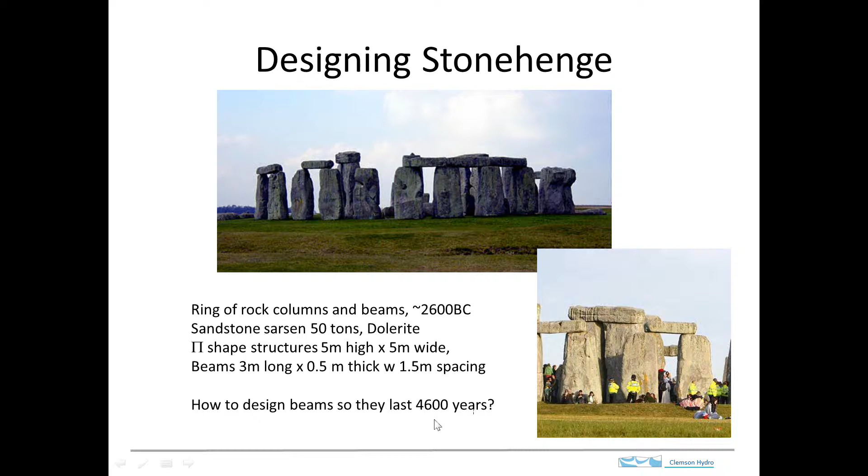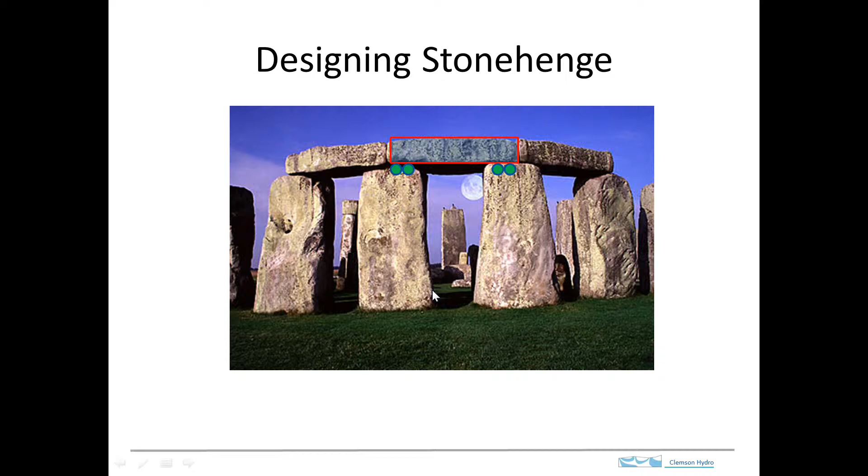And then we'll load it with a body force. So here's the size of the beam that we'll assume. In order to get this analysis to solve, we have to prevent it from moving this way. Actually, prevent it from moving this way. The rollers will prevent it from moving this way, but not this way. So I'll fix it at a single point right here, and I'll show you that in a second. So there's the dimensions, and then we need some

properties. So I went and looked up the properties of sandstone, and as you might imagine, there's some variability. It depends on the degree of cementation and what the cement is made of, and so forth. But the range for the Young's modulus is between 1 and 20 gigapascals. So I'm just going to use the middle of the road value here. And the density is this number here, 2,000 kilograms per cubic meter, so twice that of water. Poisson's ratio covers this range, and we'll use that value. And the tensile strength of sandstone is between 10 and 30 megapascals.

So dolerite, this is a mafic igneous rock, and so the porosity is much lower. The elastic modulus is higher. This is the range, and so the middle of that range is 40 compared to 10. And the density is also greater. It's 3,000 kilograms per meter cubed. Poisson's ratio is a bit lower range, although these ranges certainly overlap, and so the median value here we'll take as just 0.2. Interesting though, the tensile strength is about the same.

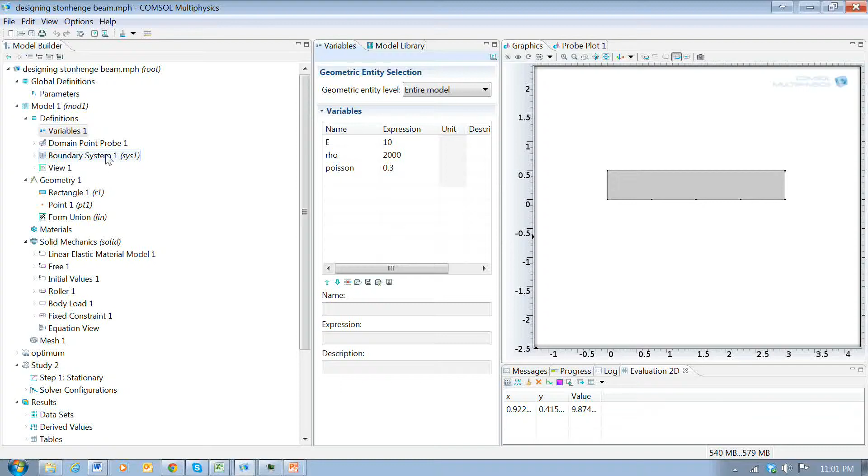I just have one parameter, the thickness, and three variables, these different material properties. That's the Young's modulus, the density, and the Poisson's ratio. And the point probe is going to be right here, right in the middle on the bottom. And I'll show you why that is in just a second.

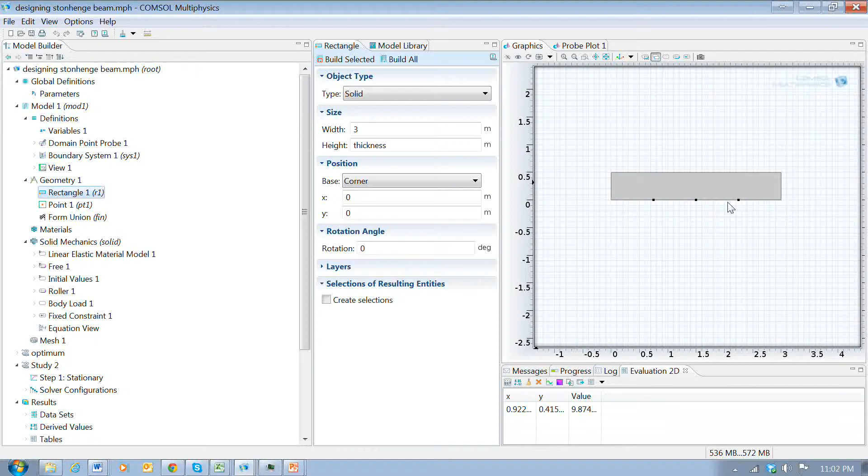So the geometry is just this rectangle, and I'm going to put 3 points here, and I'll use that to set up the boundary conditions. So we said that there's a 1.5, well, the whole thing is 3 meters. That's going to be 3/4 of a meter and 3/4 of a meter in a 1.5 meter span. And there's the points.

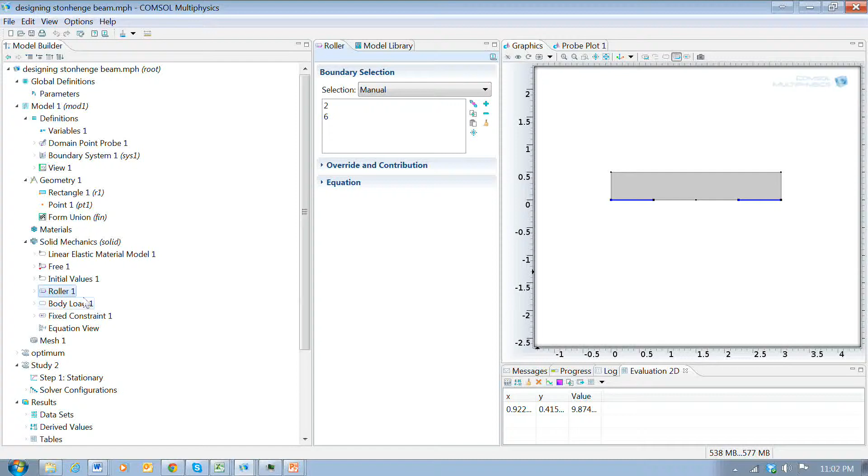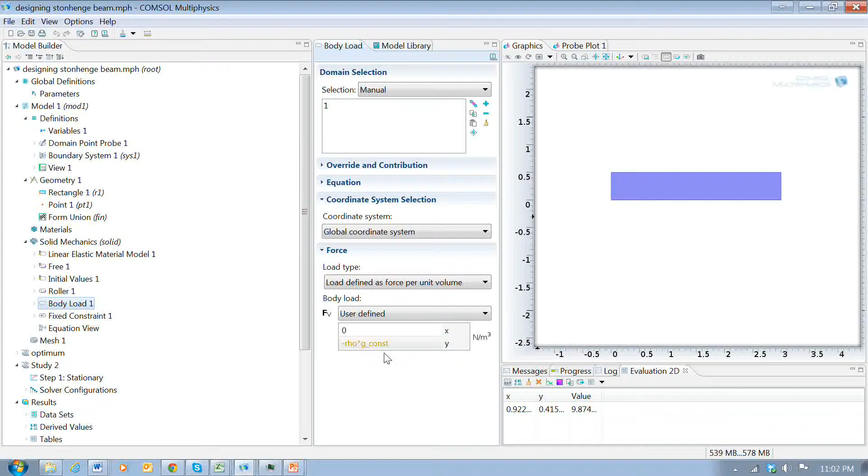And so it's a linear elastic material, and I use the properties that I just showed you. And the boundary conditions are rollers here, and I put those points in so that I can specify the boundaries over this interval. The point really is the end of that boundary condition. And then I have a fixed constraint right here, so that point does not move, although the rollers can slide. And then the body force here over the whole beam, and it's just rho times g, and g_const is the built-in gravitational constant.

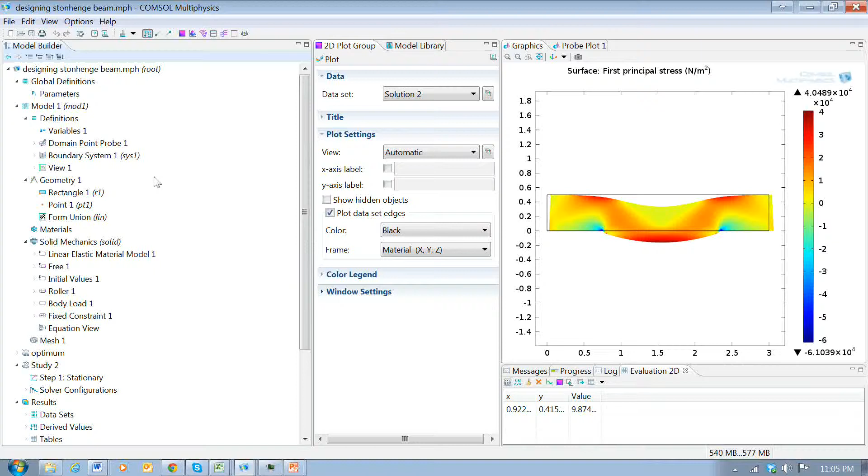Okay, so what that means is we can use the stresses at this point as really a monitor for the condition of this whole beam. All right, so that's why I put in this domain point right here, so I can keep track of the stresses at that point of vulnerability.

Okay, so the question I want to pose is how thick should we make the beam? The default here was 1/2 meter, but what would be the optimal thickness? And so what I did was to try different values.

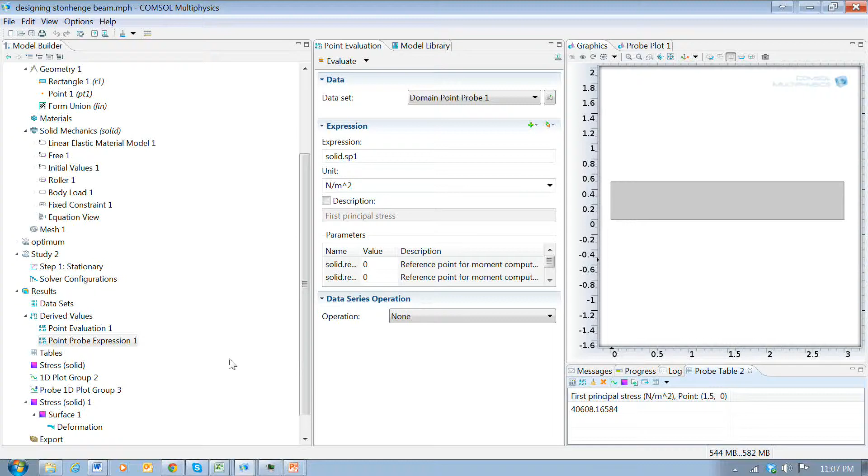So I can evaluate this point probe, and I can do this. Let's do the first principal stress. So there's the first principal stress. So 40,000 pascals.

And let's go ahead and change then the thickness. So here the thickness was 0.5, and let's make it 0.7. And let's go ahead and rerun that. The way I had this set up, the 0.7 was in the geometry right there. So I change it, it changes the geometry, gives me the new result.

There it is. And the last one was 40,000, and you can see this is going to be a bit less. The maximum there is 36,000. So we made it thicker, and we reduced the stresses right here at the center. So that's encouraging. And so let's try this again, and let's make it a good bit thicker. So make it 1.5 meters thick, and we'll try that.

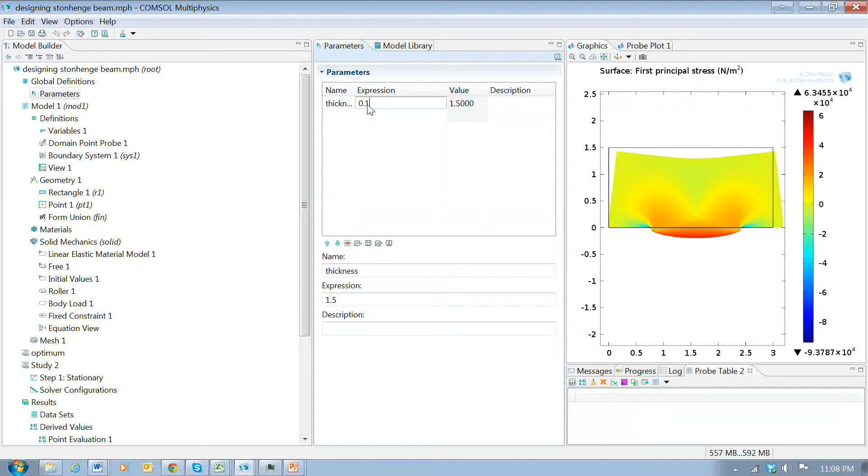Okay, so it's much thicker now. And what we get here is now the stresses have increased. The previous one was 36,000, but now you can see we're up at 6.3 times 10 to the fourth.

So we're getting bigger stresses. And so I think what's happening here is, let's go and do an extreme case. So if we make it quite thin, then we get high stresses here and high stresses here. And what's happening is when it's quite thin, it's curving a lot, and when it curves, the curvature causes fiber stress, and that curvature causes there to be stress on the outside of this curve.

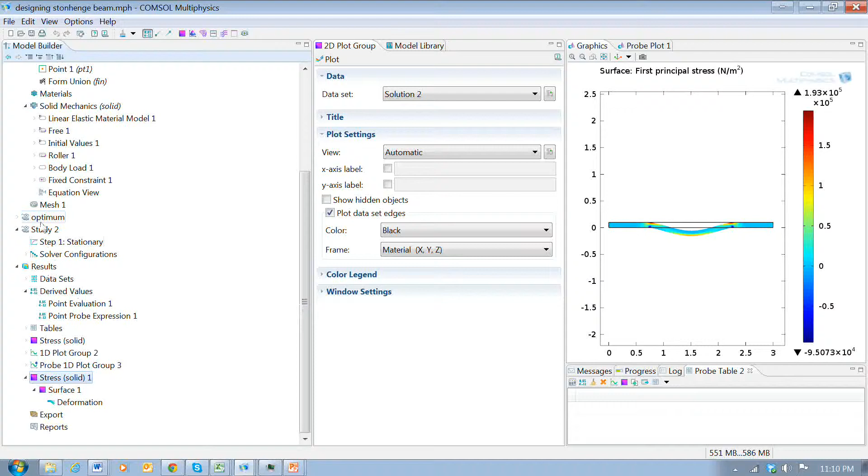So as it gets thinner, it bends more. That creates stresses. As it gets thicker, though, it gets heavier, and just the sheer size of the load increases the stress. And so there's a happy medium where it's not too thin, not too thick. And so what we want to do is to try to find that happy medium, and that would be the optimal thickness to make this beam.

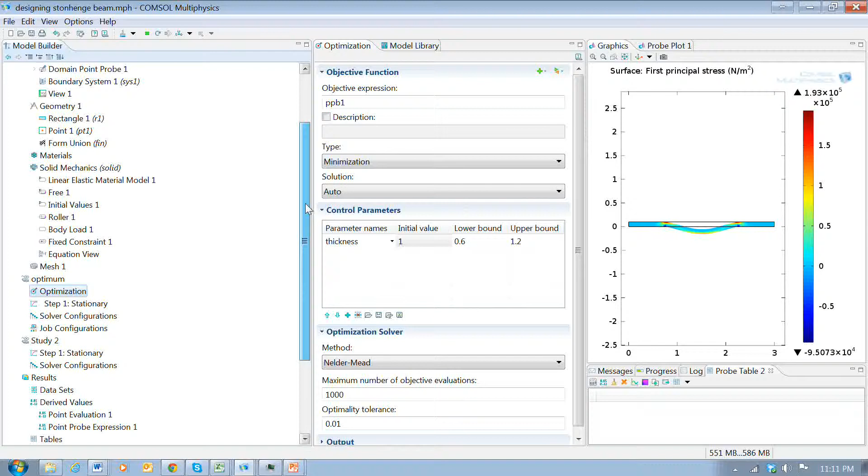So what I did was to set this up as an optimization problem. I made a study where I just right clicked and used this optimization capability, and I set it up so that this parameter is what I'm going to optimize, the thickness, and I bound it here with lower and upper bounds. So I did just some experimenting, and I found that this was pretty high and this was pretty high, and values between these numbers were lower. So I figured it's got to be in there someplace, and I give it an initial guess. So probably best to guess someplace in between the bounds.

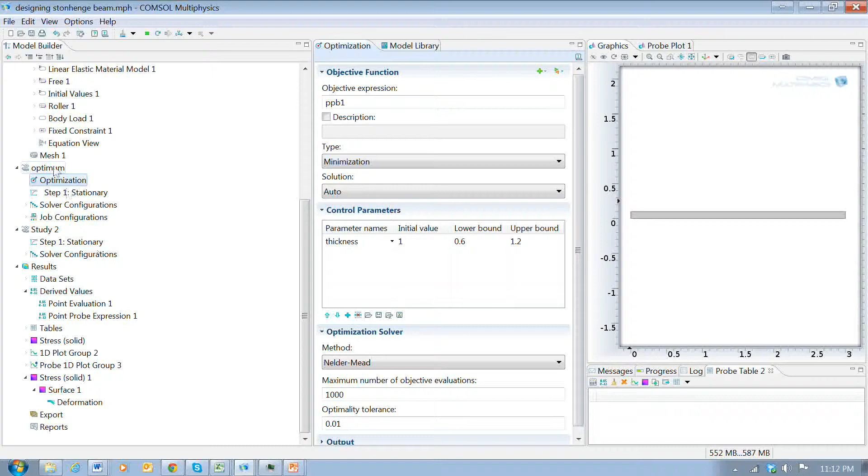And then I need up here to enter the objective expression. What's going to happen is that it will take this expression, and if I set it here on minimize, it will try to make this as small as possible. Well, this term here is my domain point probe, and I have it set up to give the first principal stress. And so when this is large, I have tension, and so by making that as small as possible, I'm making the tension at the bottom of the center of this beam as small as possible.

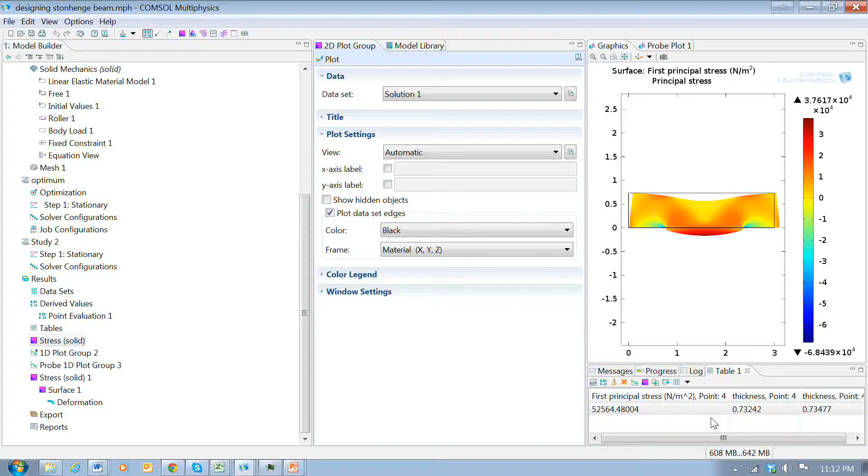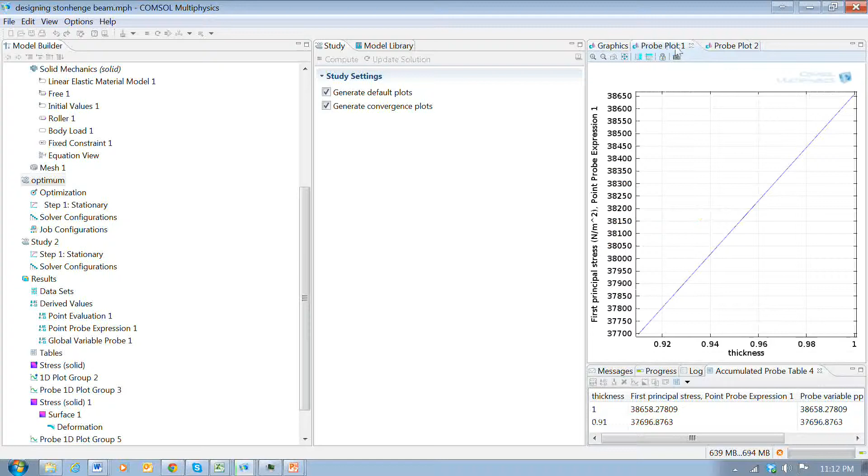Okay, so that's really all there was to setting this up. I needed to do some initial experiments to bound it, but then I could go ahead and give an initial guess between the bounds, do this objective function, and I'm ready to go. So we can go ahead and run this, and it'll print out the point probes as it goes.

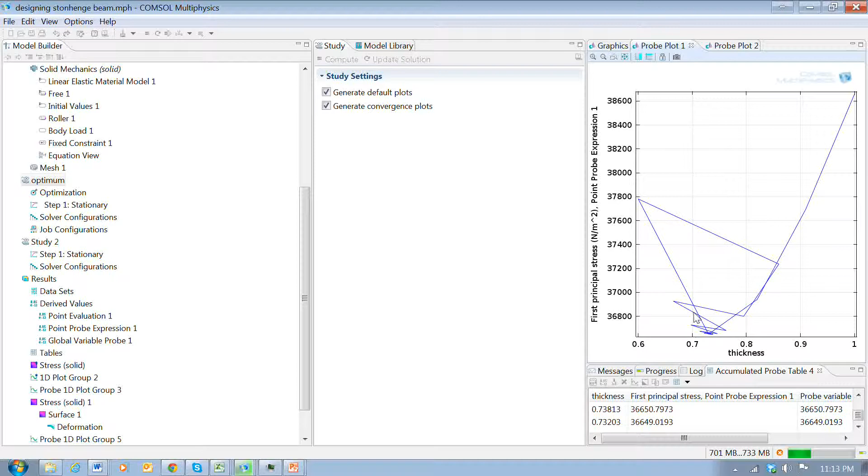Actually, this is kind of cool. So what it's doing, you can see it. Well, I don't know if you can see it here, but let's try that again. I'm going to run that again. It runs pretty quick, but we can see, I think, a nice feature of this. So we'll turn on the point probe. So this is the stress here, and we're trying to minimize it. This is the thickness. Tried this guess, then this guess, and it's going back and forth trying these different guesses. And it connects this graph with a line.

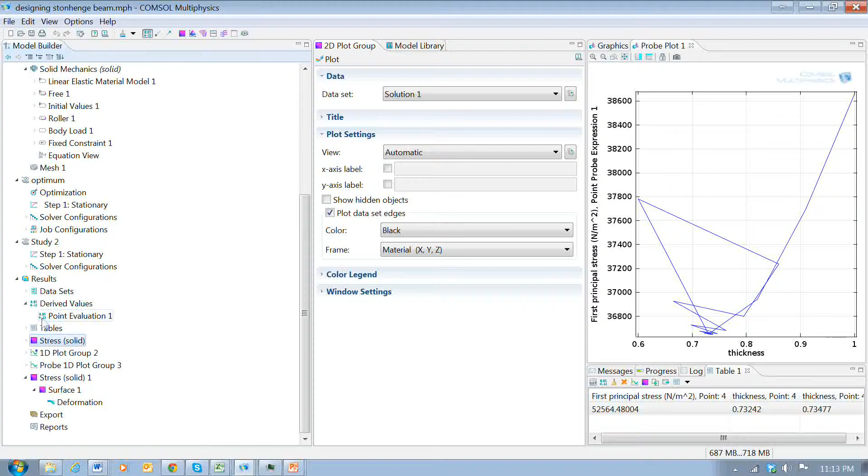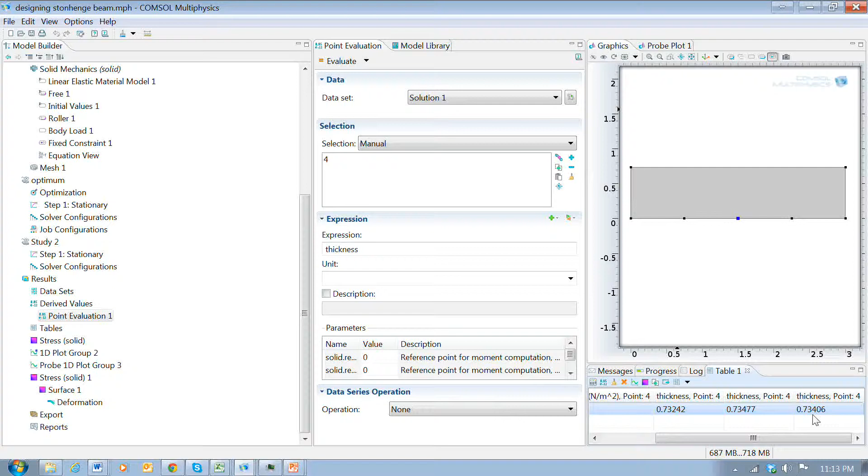But if you ignore the lines that are connecting these points, you end up with a curve that's like this. So this is the objective function, which is the principal stress, and we can see when the thickness is small, it's bending too much, we get high stresses. When it's thick, the load is too great. But right here is the optimal point, 0.7 something. We can go and print it out here. So we can just use a point evaluation, give it a thickness, and 0.734 is the optimal thickness to make your beam if you want to keep the stresses as small as possible.

So we have the optimal beam thickness for a sandstone. Evidently, those beams were all made out of sandstone, and that 0.7 meters, it's kind of hard to measure accurately from the photographs, and I couldn't find any accurate measurements in the material that I could locate on Stonehenge, although I'm sure that they have all of those stones measured quite accurately. But it seems like a reasonable thickness. So it seems like those druids or whoever built the Stonehenge blocks knew what they were doing. They're making blocks that are about the optimal thickness.

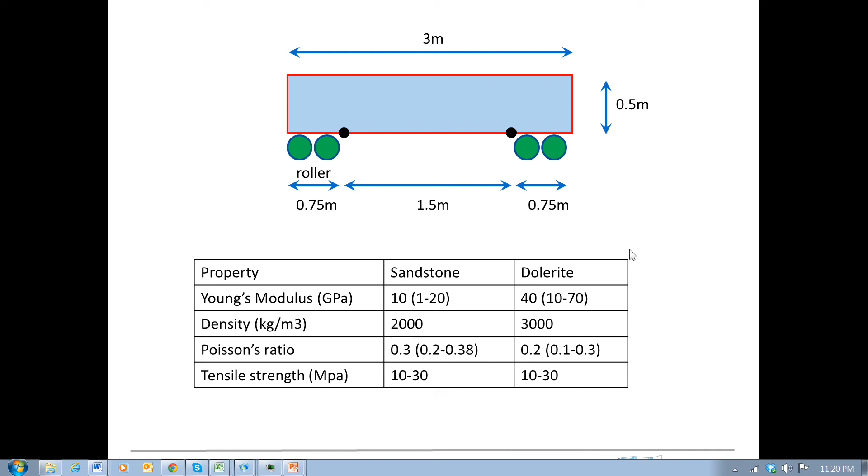So one thing that was curious was that the sandstone was used in the big blocks, the big spans. Dolerite was used for smaller structures. It was not used for the big ones. And the properties of dolerite are a bit different. And so I wondered why this might be. And so what I would suggest that you do is see if you can figure out why that could be.

And I mean, there are a variety of explanations. Perhaps they were just built at different ages, or the rocks had some different significance. I don't know those aspects. But just strictly from a mechanical point of view, why would sandstone be preferred over dolerite for large structures, basically?